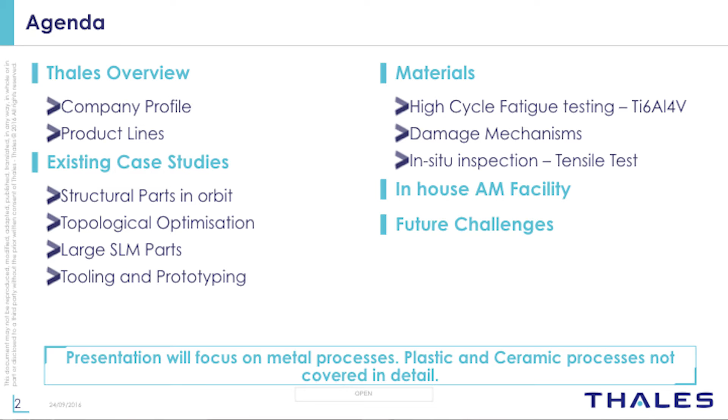So quick chat about the company profile and some of the product lines that we work in, and then we'll go through some of the existing case studies that we've been developing and working on over the past number of years now. Quick bit of information about some of the materials and material properties that we've been working on in-house using some of our suppliers. Brief overview about our in-house additive manufacturing facility that we're building at the minute in Morocco, and then some of the future challenges that I expect that we are facing in industry in order to move this technology forwards.

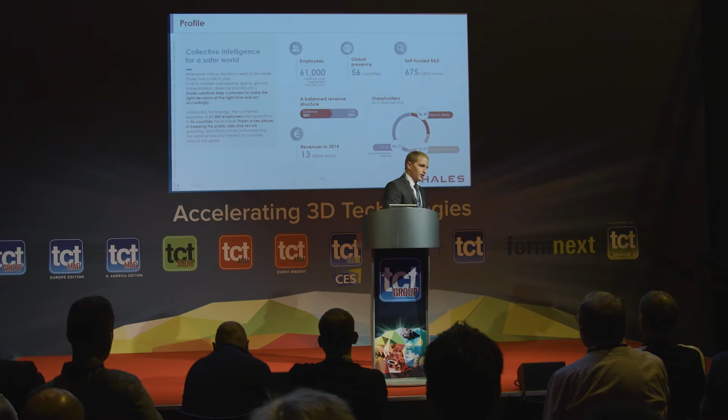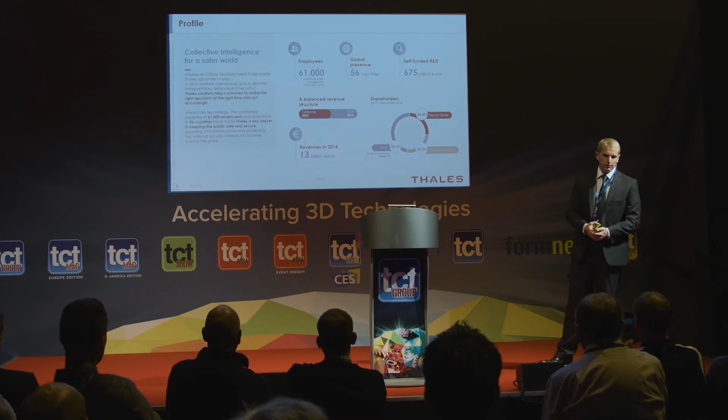Okay, so the company profile itself, we're around the 60,000 employees mark worldwide. We're currently in 56 countries throughout the world. It's a French company in itself, but we have markets in many other countries. Within the UK, we've got around about 10 sites spread out throughout the UK. I'm based down near Gatwick. We have sites across the UK there.

The main point for Thales itself is we're very spread out in terms of our product lines. So we have business units within the aerospace and space divisions, of which additive manufacturing is playing quite a key part of that as it stands and in the future. We work on ground transportation, lots of things within the UK and abroad. We've got quite a big defence market, lots of things in the news that you would have seen in the markets there, and lots of our cyber and security side of things. So today this presentation mainly focuses on the space aspects of our business, as that's what we've published so far. But I'll touch on some things within the aerospace and defence side as well.

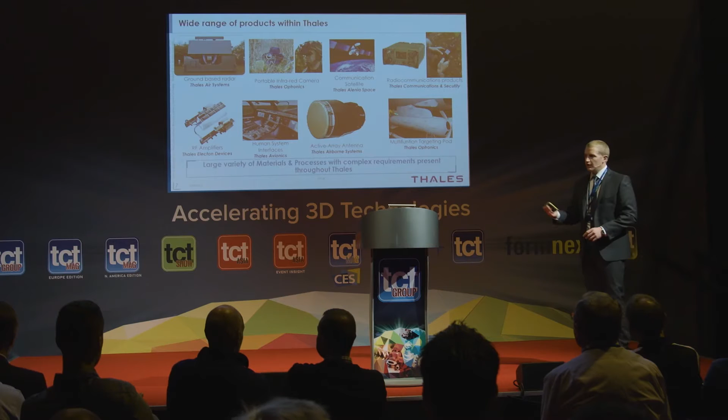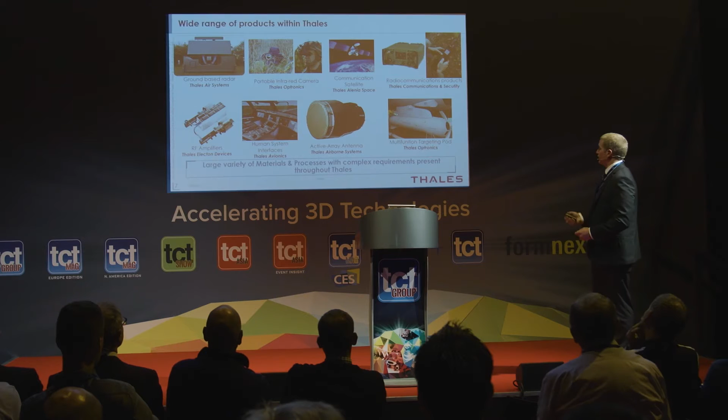Looking at some of our products, so Thales in itself, unlike GE or Rolls-Royce, we're not going to be putting additive manufacturing components inside jet engines or inside main high temperature, high strength parts like that. But what we are using them for is for structural components and other components within some of our other systems. So some of our defence platforms and our satellites, the space side is mainly driving this. And then we go through other handheld equipment through to electrical items. So a lot of high power microwave amplifiers and avionic equipment down on the right hand side.

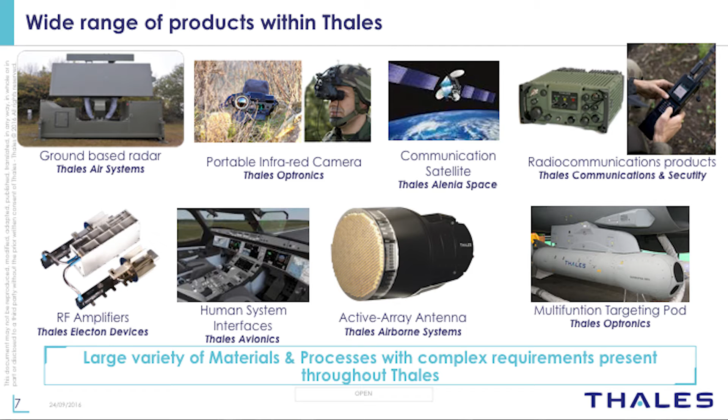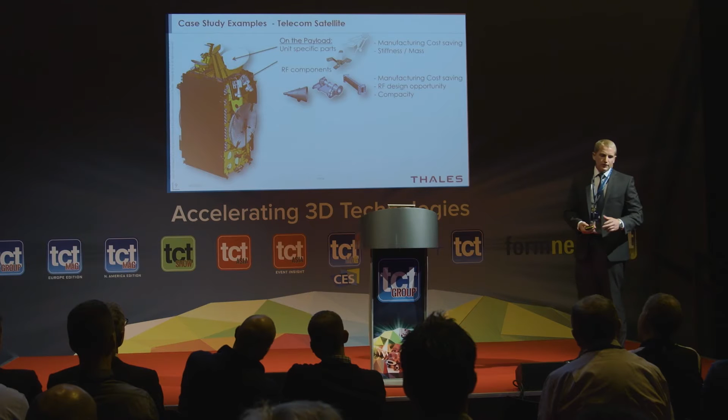So going on to some of our existing case studies, now these are some things that we publish over time here. Looking at one of our telecom satellites that we're part of here. Sorry, rolling back a sec. One of the things we've been doing is actually just taking, like our previous speaker said, going back to our first stage of the design and seeing where we can actually apply additive manufacturing rather than looking at redesigning parts based on this. So within this example here, we had identified a few structural components and some components with some key electrical characteristics that we needed to maintain. On this satellite as well, there's also some larger structural components and some complex assemblies.

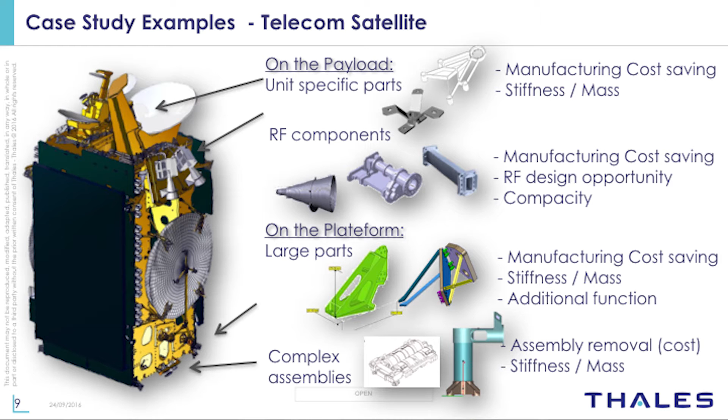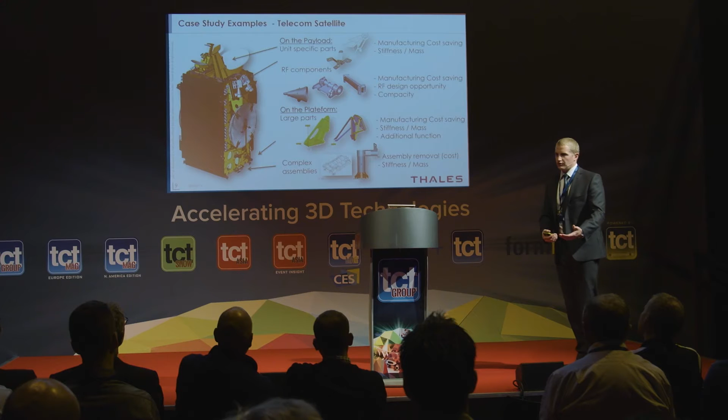So two things there: if we're reducing the mass from a space point of view, we're reducing our launch fees by a great deal. It's tens of thousands of euros or pounds depending on where you're working. And then from a design point of view, if you can combine components, as our previous speakers have alluded to, then you can save on your design cost, you can save on your qualification cost and time. So with those two things in mind, we're looking at saving mass and the cost of our products here.

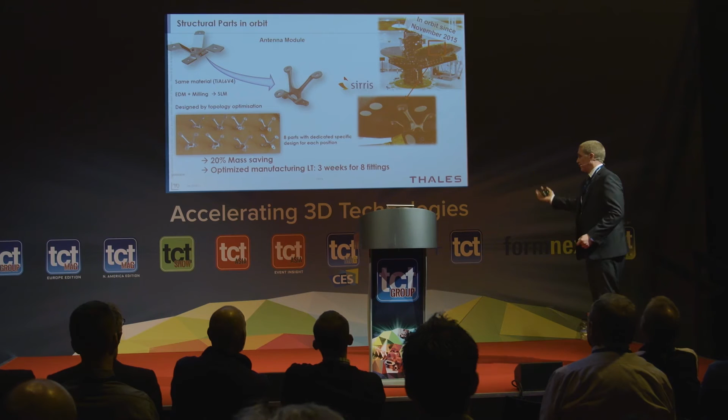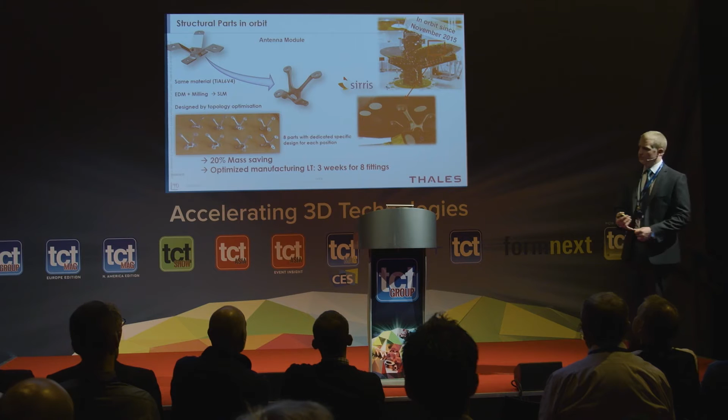Now, if you imagine, we're not making hundreds of satellites, we're making 2s, 3s, but on this satellite itself, in this picture on the top right, there's 2 dishes, so there's 16 parts that we've used here to save weight and some cost on here. On top of that, if you look at the lead times that we've saved on here, using additive manufacturing in the correct way, we can produce these in 3 weeks for 8 parts. I haven't got the figures for what it would take from a machining and casting point of view for this example, but this is a piece that we're using to provide some initial qualification data whilst we're working with our suppliers here.

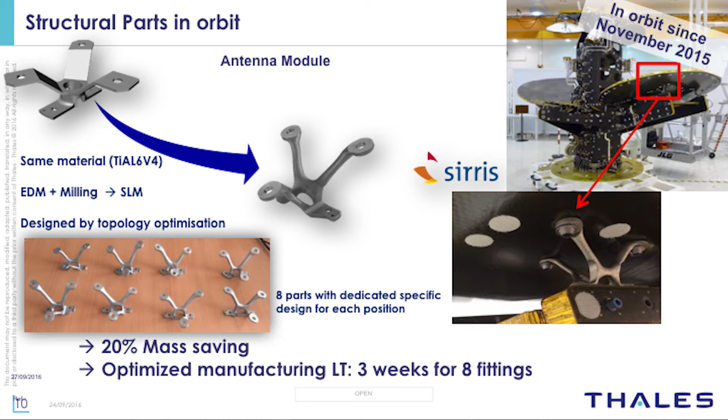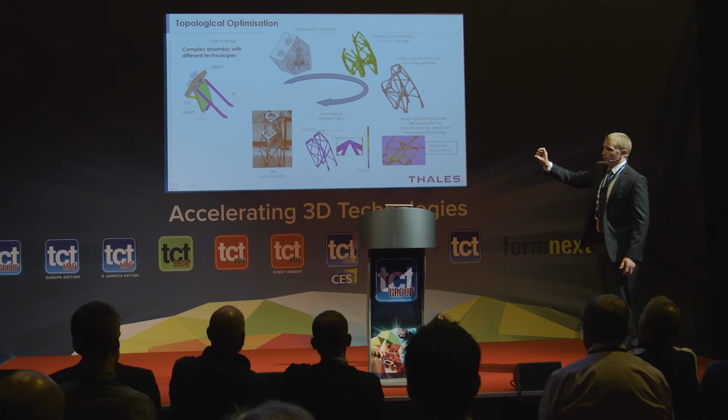So again, touching on the optimization slides that we've covered before, this is looking at optimizing the structure on the left-hand side. It's a microwave component, so there's a couple of microwave horns pointing up to the top left-hand side of the screen, and then there'll be 2 rectangular waveguides coming out the back of those horns.

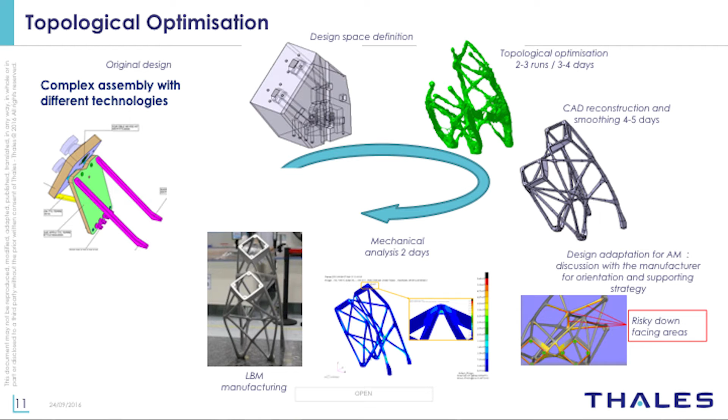So what our design team had to do is define the space needed not only for that waveguide to fit through, but also for the team to install the waveguide within that section, which forms the grey box in the top left. Then, over a series of iterations, as the speakers have talked about already, we end up with an optimized design, which we can then import back into our CAD program, remodel, forming the design on the right-hand side. It then goes through our normal design validation process and an extensive amount of testing here as well.

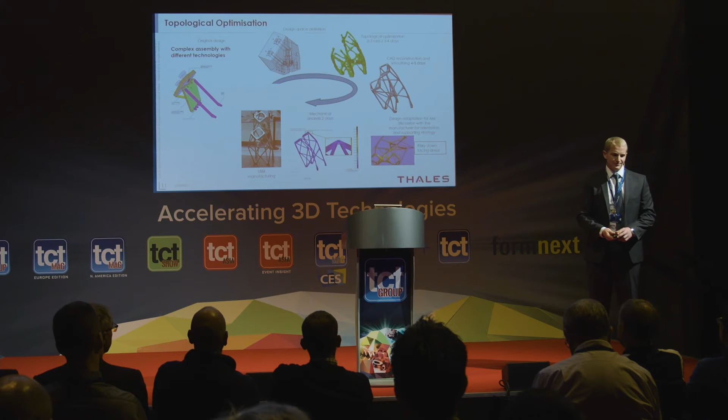So this is the largest SLM, selective laser melted, part that has been qualified for space flight that I'm aware of within Europe. It's something we developed out in France with Thales Alenia Space, one of our parts business units within the company, and it's due to be launched into orbit later on this year or early next year. These will be on 2 satellites, so again, it's not really high quantities here. To give you an idea of the cost involved with that, we're really at the low end of quantity here.

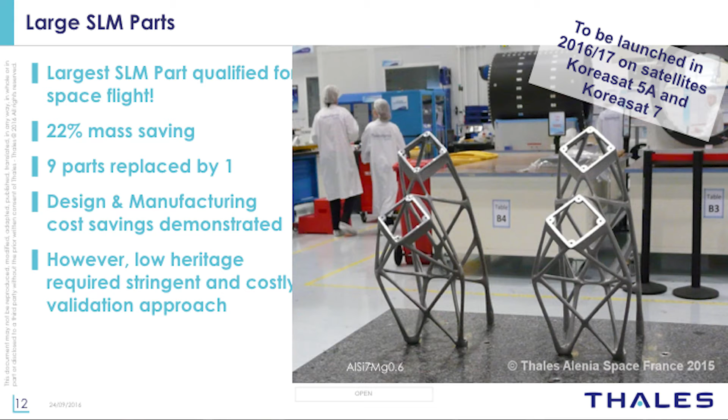Going back to the other points, we saved around 20% on the mass, which, okay, perhaps you could save some more, but again, the mass is a key driver on the cost of our launch fees and the cost of these parts. It's quite a good saving there. As has been said before, it's quite low heritage with these systems, so it's quite costly to validate these parts. In this example, 2 of these just about fit within the machine that these are printed on. One is destructively tested, the other one's inspected and has some other validation done on it. So for every one we fly, we need to build 2, as it stands.

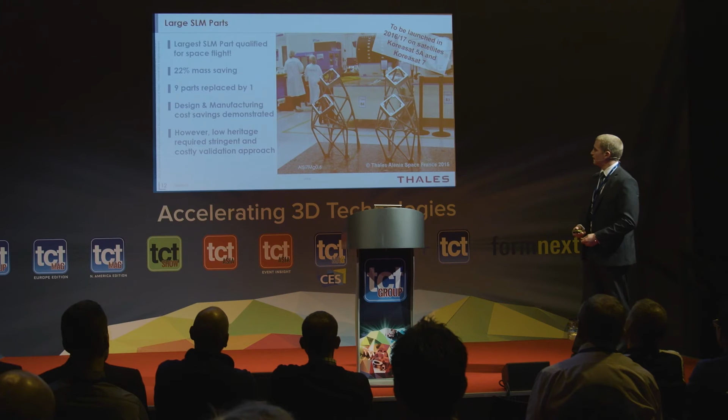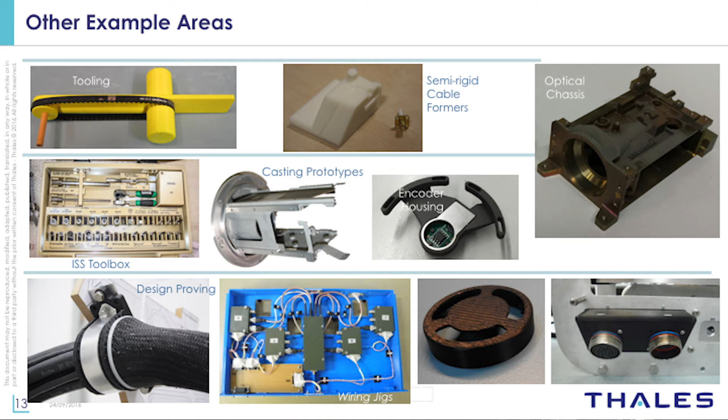Just going over some other examples of other areas, this presentation mainly covers the metal side. We've done quite a lot of work on tooling to save on our production costs. Lots of prototyping work as everyone is now doing within the industry. We're also using SLM for some cast parts as initial prototyping, if you like, whilst we're waiting on the other parts coming out of the foundry there.

So moving on to the second half of this presentation, I'm going to share with you now some information on what we've been doing on materials testing. Now, these are just some results that were published in a paper before by one of my colleagues. So to date, we've conducted a lot of tensile testing on a number of different materials on the list on the side, from FDM, SLA, SLM and EBM processes, along with some others which I won't go into today.

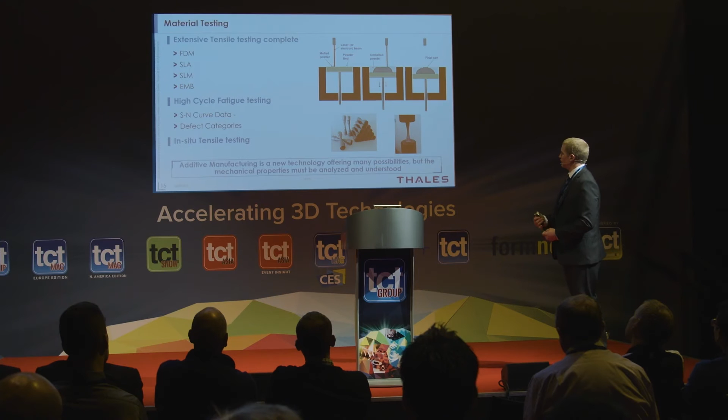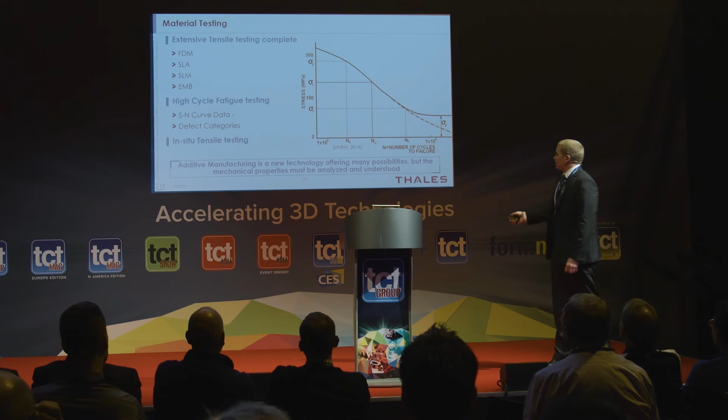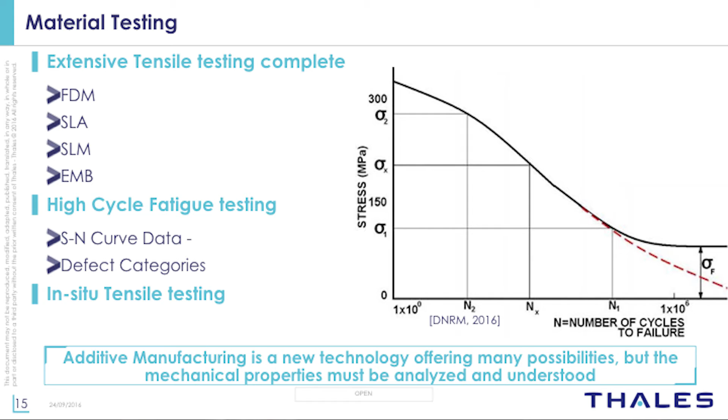What I'm going to talk about now is some results of our high cycle fatigue testing. Now this is a bit more involved than just the tensile test. It's repeated over a length of time and involves these little dumbbell test samples in the bottom right. So the idea of this, these data points would give us the information we need to generate this S-N curve, this Wöhler curve. Our data points would be above the curve, and our design space, if you like, would be below the curve, for those of you who aren't too aware.

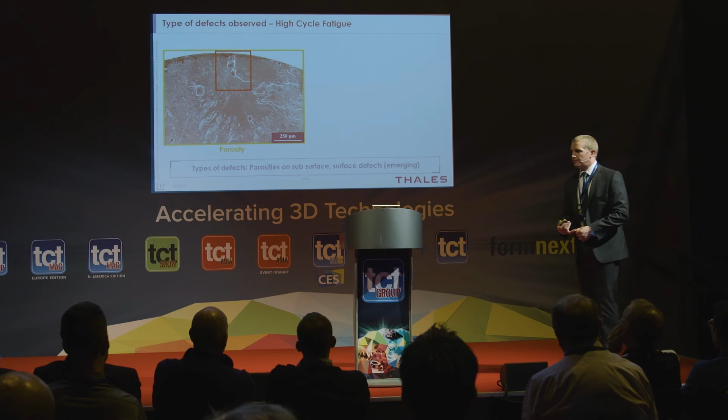As part of this testing, we've noted a number of defects. They're categorized into 3 different areas, as we'll go on to in a minute. The ones here are porosities, which you'd see in similar cast parts; surface defects, so cracks or unmelted areas of powder on the surface of the components.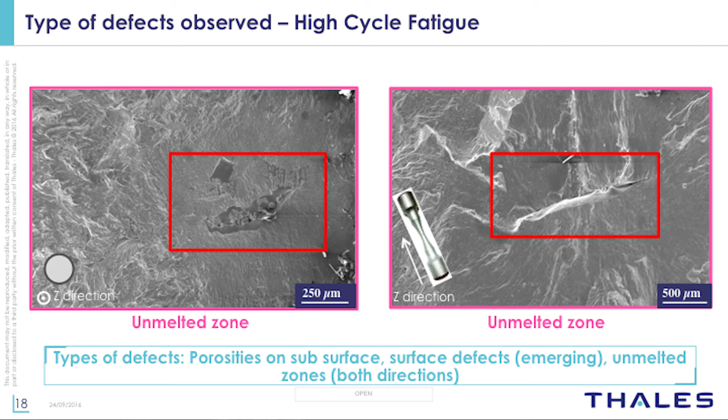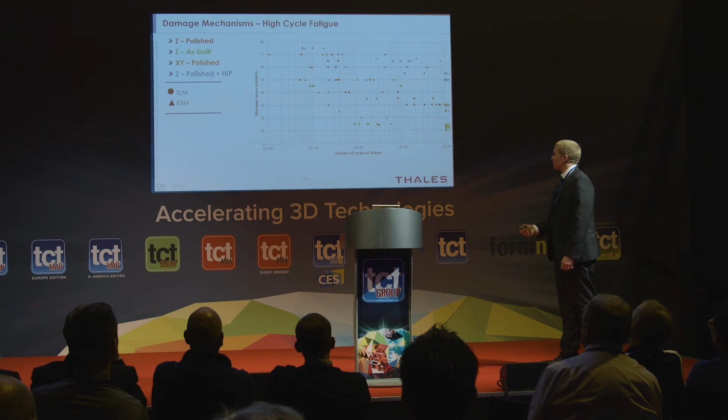This has given us a whole load of data that's been collected over quite a long time now. There's a series of dots and triangles which show SLM and EBM results. And what this shows us is that actually, as long as you get the right supplier and the right processes, SLM for this material seems to be comparable to EBM, the same thing.

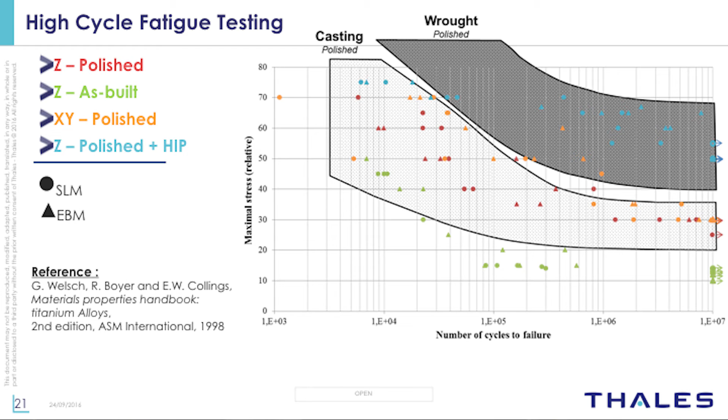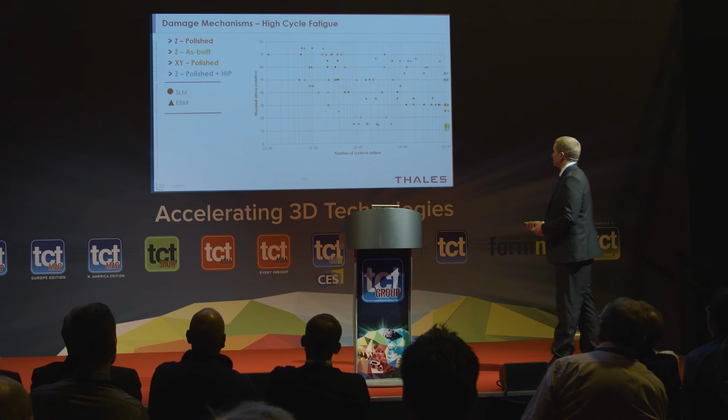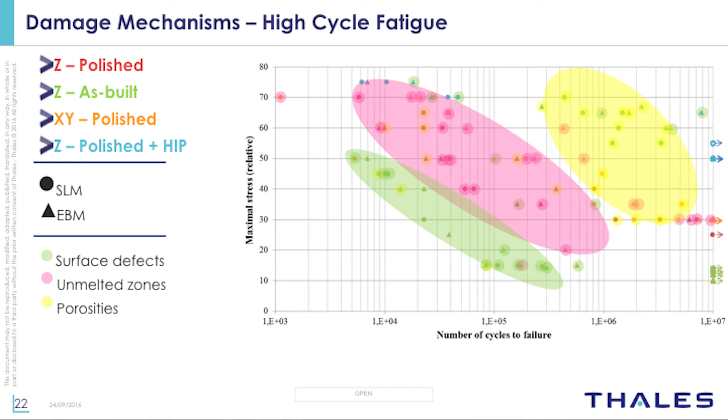So what I'm going to show you now is going on the defects that we looked at a couple of slides ago. This gives us a few areas where the defects seem to be the main failure. So if you look at the green area down at the bottom left, most of these failures were due to surface defects on the test samples. Now these test samples were as-built samples, so there wasn't any post-machining or polishing on there.

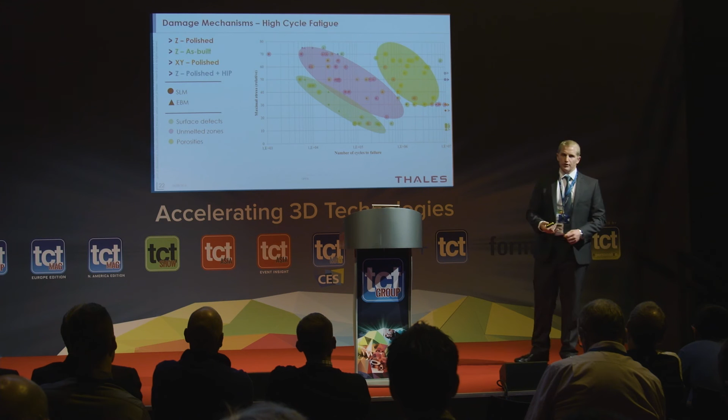The area in the center, this is mainly down to unmelted zones within the part, so more to do with things you can't see from the surface or through penetrant inspection. And then in the top right, we've got failures due to porosities at really high cycles.

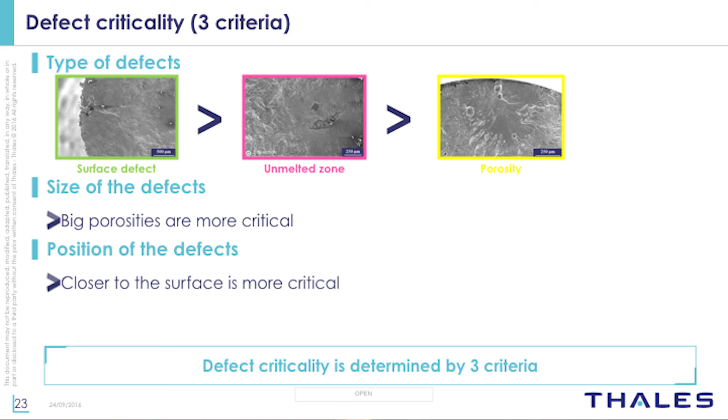So again, looking at the defects there, these are the three key areas. So the main one would be surface defects. If you know you've got an area that's critical to the strength of your part, you could look at polishing or machining the surface in that area to remove these. Then the next failure tends to be unmelted zones or unmelted areas of powder within the parts, and then porosities as well.

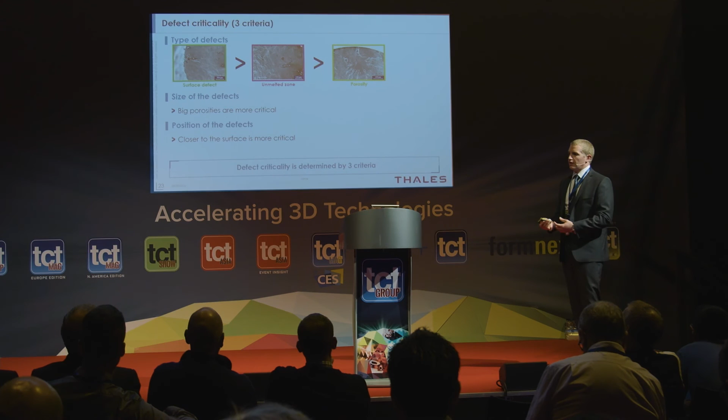Turns out that from what we found, big porosities are more critical, causing an earlier failure, even though they're right up on the far right hand side of the chart we saw earlier on. But at the same time, if they're close to the surface, they're also more critical. So when you're doing your analysis of your parts in the qualification stage, these are some of the things we found that we need to look for when we complete our scanning.

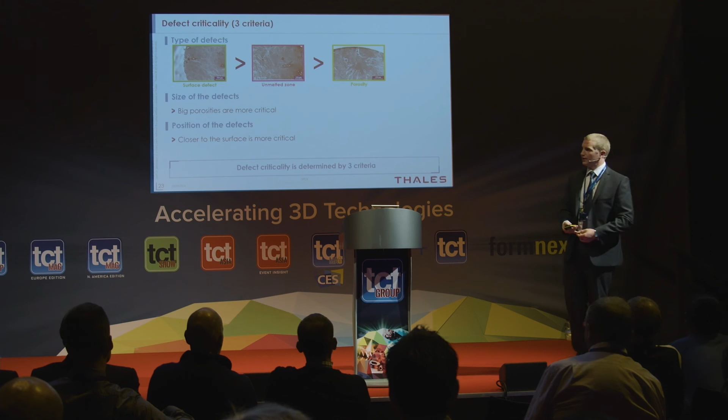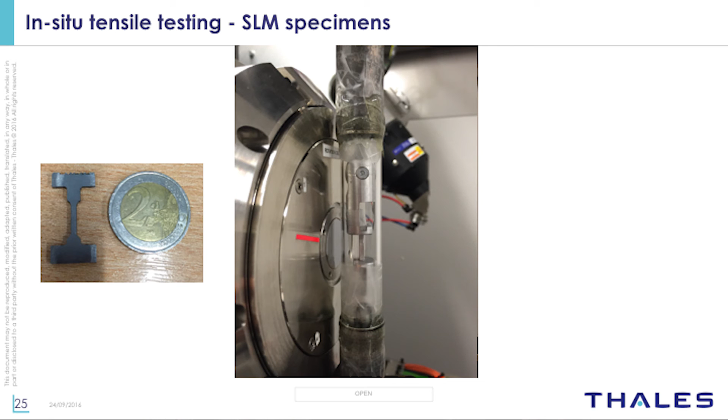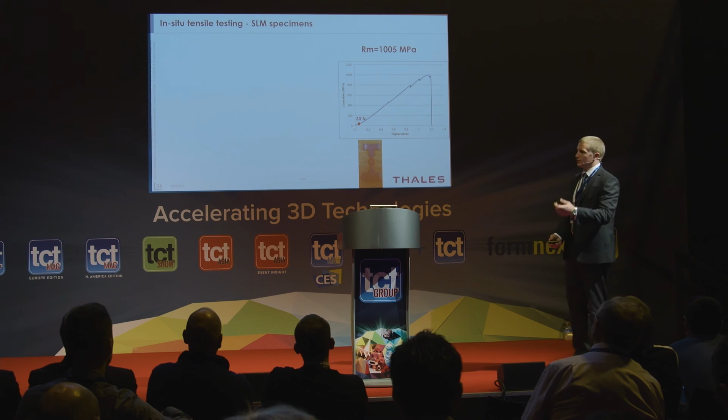So this is something that was just a bit of interest from my side. This is some in-situ testing or inspection during a tensile test. So here we have a machine that can monitor our parts during a tensile test. If we zoom in this area, we'll see our little test sample on the left next to our lovely £2 coin, maybe not, euros. And the test sample is just in the center there. So during our tensile test, you'd hear some pings or some clicks, and that would correspond to a drop in the curve on the right.

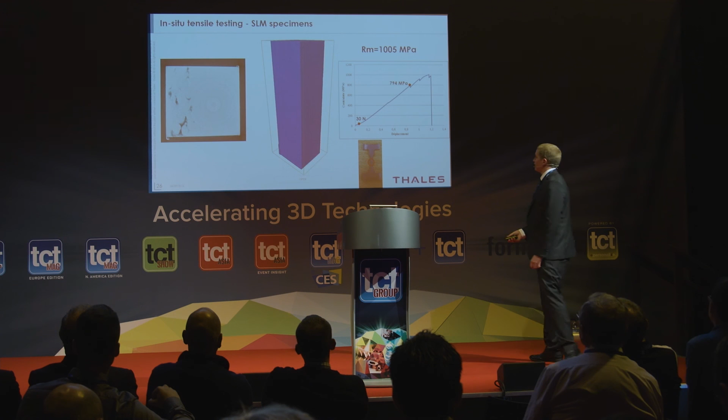So this is a scan of the cross-section of our test sample, the red circle in the bottom right. And as we go through, we can start to see these defects start to appear. So if we jump between these slides, you can see the cracks start to appear in here, which is quite a good indication of where some of these defects were coming from. It was just a nice thing to see from my side of things.

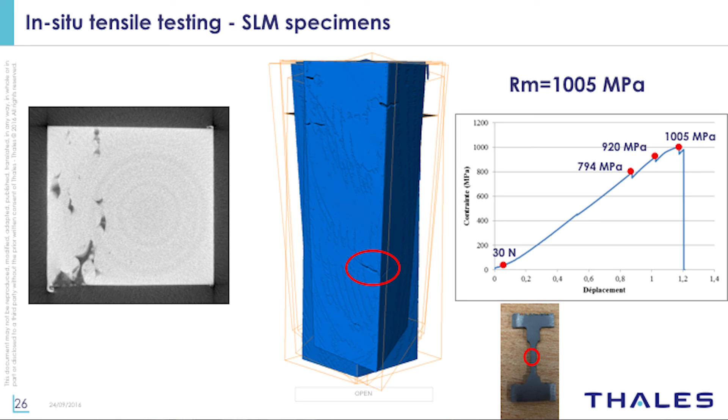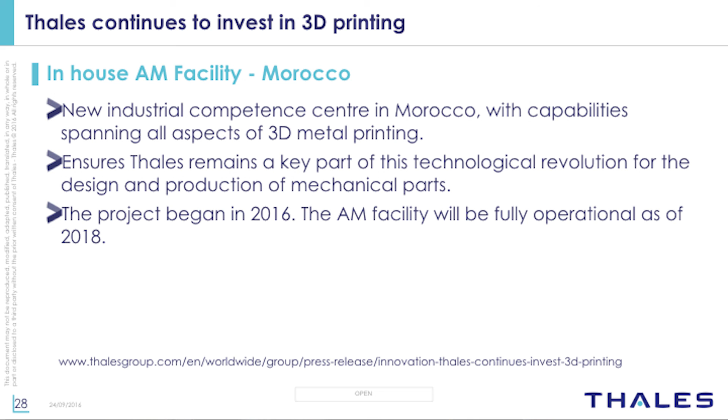So quickly to wrap up, this is released as part of a press release. With a new facility that we're developing over in Morocco, we've decided to take some of the manufacturing in-house in terms of the 3D printing side to ensure that we remain quite a key player within the additive manufacturing technology. Can't say too much else about this as it stands, but there is a press release online.

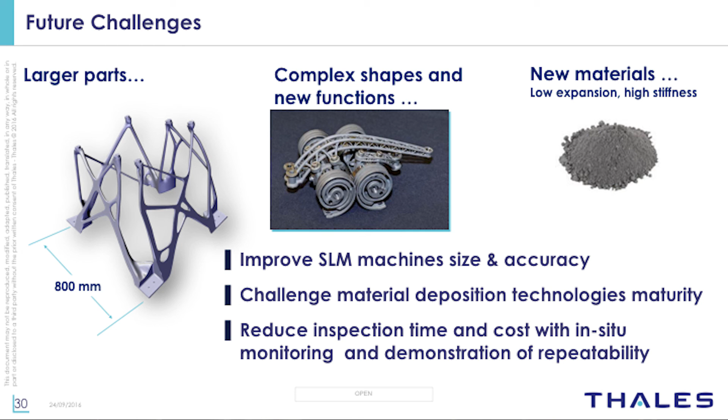Moving on to future challenges. So the main things that we foresee as future challenges in our industry, and things that would help us through our technology, is to see if our machine manufacturers can increase the build envelopes of some of the main processes to allow us to build larger parts and combine more components. We're looking at incorporating more complex assemblies and moving assemblies into one build, and we're also looking at new materials which we can use within our parts here. That's a bit of a summary there.